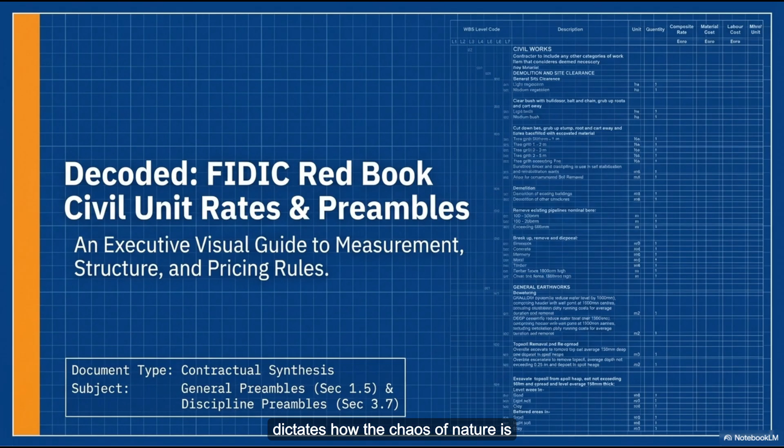Just a few. Yes. You have to define legally and financially the exact cost of every single grain of sand, every hour of labor, every potential physical risk. So when you see the unit rates priced out in euros in this document, it acts as a universal financial translator. It dictates how the chaos of nature is transformed into human order.

Yeah, perfectly put. And, well, before you can build that order, you have to dismantle whatever was there first. It's the ultimate blank slate. The demolition phase. Right, WBS category 600. And rather than just rolling in a bulldozer and pushing some dirt around, the schedule shows this hyper-granular approach to neutralizing the existing environment. Like, it starts with site clearance, and it prices trees not just by the fact that they are trees, but by their exact physical dimensions.

Yeah, the schedule breaks down the labor required in these precise increments. So it lists a baseline rate for removing a tree with a girth of 500 millimeters up to 1 meter. Okay. Then it scales up like 1 to 2 meters, moving incrementally all the way to a specific line item for a tree girth exceeding 5 meters.

Exceeding 5 meters. I mean, imagine standing in front of a tree that massive and knowing there is a predetermined euro value attached to the physical labor of cutting it down, grubbing up the stump, pulling out the massive root system. Wait, hauling it all away. Right, carting it away and backfilling the hole so the ground is perfectly flat again. It feels like a surgeon meticulously prepping an operating table. You're clearing the ecosystem so the real work can begin.

And that surgical prep also involves managing invisible forces before you ever even dig a foundation. Like what? Well, WBS 601 covers general earthworks, and it has these incredibly detailed pricing models for dewatering systems. Because if you are digging in an area with a high water table, the earth is essentially a giant sponge. Oh, right. You have to squeeze the water out and hold it back, or your trench just turns into a lake. So what does that actually look like on the ground? Like, how do you price holding back groundwater?

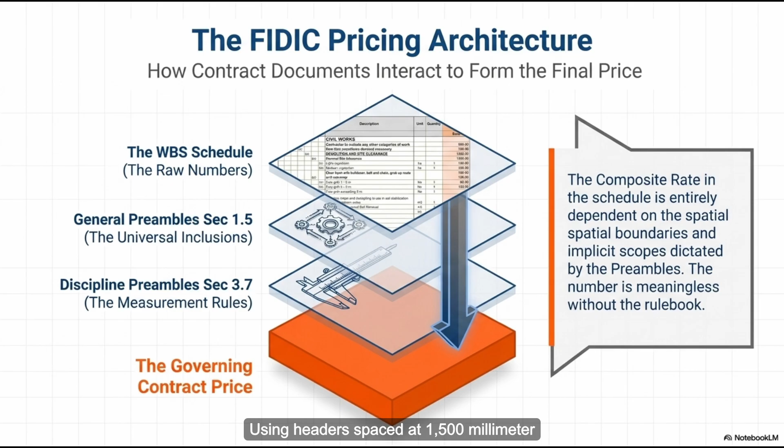It depends entirely on the depth and the physics of the water pressure. The document prices a shallow dewatering system, which reduces the water level by 1,000 millimeters using headers spaced at 1,500 millimeter centers. Okay, so that's for shallow water. Right. But if you need to reduce the water by more than 1,000 millimeters, it requires a deep system. So the well points are placed much tighter together, like at 1,000 millimeter centers, with significantly more pumping power.

Wow. You are literally paying for the mechanical force required to hold back the ocean or the local aquifer, just so your operating table stays bone dry. And once it's dry, you have to actually dig.

And this is where I need to push back a little bit on the sheer number of line items, because the document gets almost obsessive here. It really does. When it comes to excavating rock, they break the depths down layer by layer. There's a unit rate for digging rock at a maximum depth not exceeding 0.25 meters, then 0.25 to 0.5 meters. Half a meter to 1 meter? Yes. It marches down incrementally all the way to rock requiring blasting at depths exceeding 15 meters.

So my question is, why not just charge a flat rate for digging rock? I mean, rock is rock, isn't it? If I'm paying a contractor per cubic meter, why does the depth dictate dozens of different price tiers? What's fascinating here is that in the world of mega construction, risk is money. Okay. The deeper you go, the more the fundamental physics of the job change entirely.

Like digging rock at a quarter of a meter below the surface, you can use standard heavy machinery, like an excavator with a breaker attached. Well, you can just smash it. Exactly. It's predictable. You can see what you are doing. But once you go past 5 meters, 10 meters, and especially exceeding 15 meters underground, the geology becomes incredibly unpredictable. Because the pressure changes? Or is it that the density of the Earth shifts?

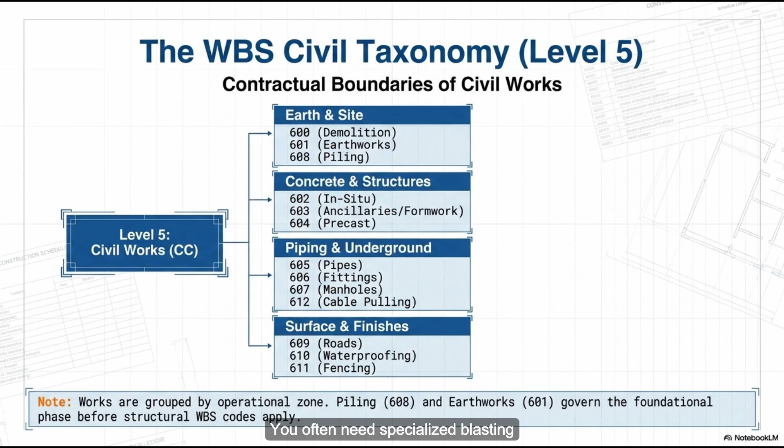Which means explosives. Explosives experts, safety perimeters, vibration monitoring for nearby structures. The schedule forces the contractor to account for that escalating unknown risk up front. By forcing the pricing into these micro increments, the contract acknowledges that removing a cubic meter of rock at the surface is fundamentally a different physical and financial undertaking than blowing up a cubic meter of rock 15 meters underground in the dark. That makes a ton of sense. You are pricing the uncertainty of the Earth itself.

Exactly. So the ground is cleared, the water is held back, and this massive, heavily calculated hole has been blasted out of the rock. Now, the physics problem flips. Just to build it back up. Right, you have to fill that void with something stronger than the Earth you just removed. Which brings us to WBS 602 and 603, the foundation. Mm-hmm. And the concrete specifications are really something. Concrete is never just concrete.

Yeah, those are synthetic, plastic-like fibers. You mix them directly into the wet concrete before it's even poured. Wait, how does that actually work? Does it replace the steel? In many applications, yeah. Instead of laying down a heavy, cumbersome grid of steel wire mesh, you mix millions of these tiny fibers into the cement truck. That's crazy.

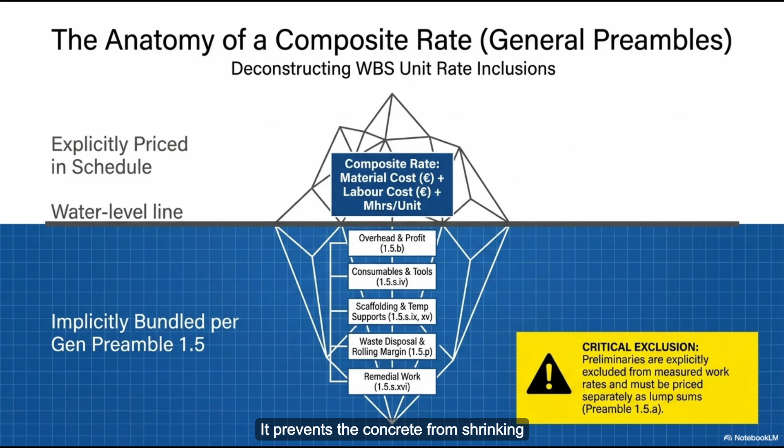When the concrete cures and hardens, those fibers act like a microscopic three-dimensional web holding the concrete together from the inside out. It prevents the concrete from shrinking and cracking as it dries, and crucially, it requires 0 labor hours to assemble compared to cutting and tying steel mesh. That is wild. And it gets even more advanced. My absolute favorite line item in the concrete section is the carbon fiber reinforced polymer strengthening strip, the Sika CarboDur. Oh yeah, that's high-end structural engineering.

The document specifically prices out applying these 1.2 millimeter and 1.4 millimeter thick carbon fiber strips bonded directly to the surface of the concrete with epoxy resin. To use an analogy, building with standard steel rebar is like putting bones inside the concrete to give it structure. But bonding these carbon fiber strips to the outside is like putting the concrete in an ultra-tight, unbreakable exoskeleton.

Yeah. It distributes the load and the weight entirely differently, giving it incredible strength without adding mass, like upgrading from a heavy iron broadsword to a high-tech scalpel. And that completely alters the economic nature of the build, because those carbon fiber strips cost significantly more in raw materials.

They are priced per meter in the schedule, but they require completely different labor and equipment compared to hauling and hoisting tons of solid steel. So it's a trade-off. Exactly. You trade material costs for speed and structural efficiency.

And the schedule goes just as deep on the temporary structures used to pour that concrete. The molds, essentially. The wooden or metal framing you pour the wet concrete into so it holds its shape while it dries. Yeah, and the schedule meticulously separates this formwork by the desired finish and the physical plane. You have separate unit rates for a rough finish versus a fair finish. Yeah. And then it breaks those down further by horizontal planes, sloping planes, vertical planes, and battered planes.

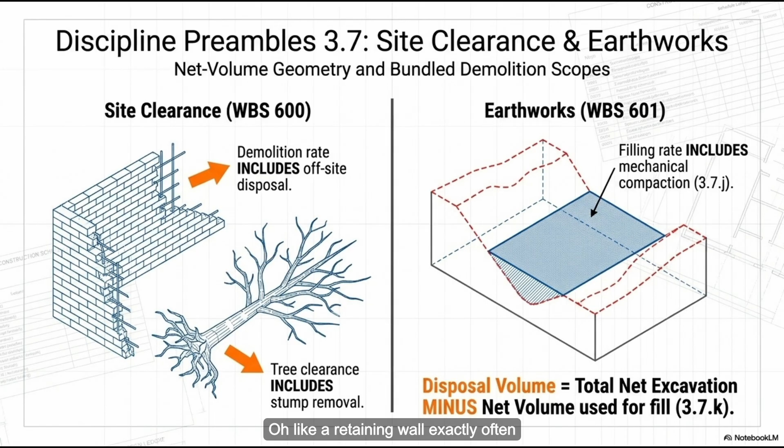So I have to ask, what exactly is a battered plane in this context? Because it sounds like concrete that's been in a fight. It does, right? Yeah. But no, a battered plane is a wall with a receding slope, meaning it leans backward as it goes up. Oh, like a retaining wall. Exactly. Often used to hold back earth.

So if you are pouring a battered wall and you require a fair finish, meaning a perfectly smooth, architecturally pleasing surface with no visible seams or imperfections, the mathematical precision required is exponentially higher than pouring a rough horizontal slab that will just be buried underground anyway. Because the mold has to be absolutely flawless. Flawless, and constructed from higher grade materials like specially coated plywood or steel panels that won't leave a wood grain imprint. The joints have to be sealed perfectly so no wet cement bleeds out and creates a ridge.

The labor time to assemble that flawless mold, the chemical release agents used so the mold doesn't stick, the care taken during the actual pouring, all of that is dictated by the phrase fair finish. So every time I walk through an underground parking garage or a modern building lobby and I see a perfectly smooth, sloping concrete pillar, I should be thinking about the fair finish, battered plane line item. You really should. That smooth texture isn't just an aesthetic quirk, it's a specific labor cost and material upgrade that someone calculated down to the euro. Every single aesthetic and structural choice is quantified.

Okay, so we have our high-tech, fiber-reinforced concrete foundation poured into mathematically perfect molds. But a mega project isn't just a solid block of stone. It needs systems to run through it, to supply it with water and power. Infrastructure. Right. And it needs to be anchored deep into the bedrock so it doesn't tip over. This brings us to WBS 605 and 606, the hidden underground world of pipes and piles, what I like to think of as the invisible nervous system of the project.

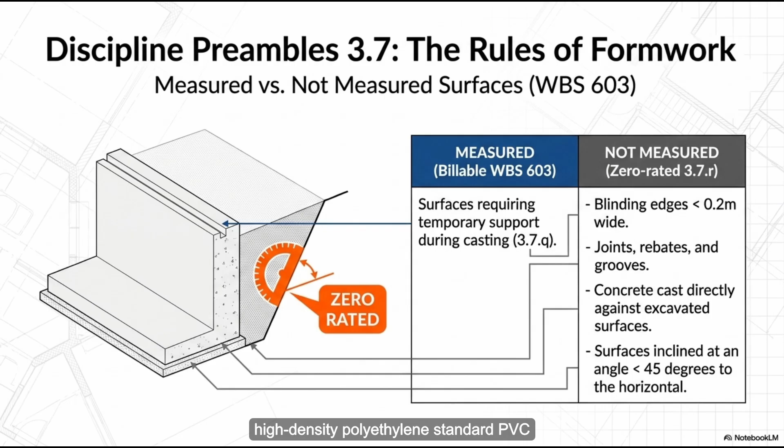Yeah, looking at the pipework specifications, it is a masterclass in how materials science dictates project planning. The array of materials is dizzying. The document lists GRE, which is glass reinforced epoxy, HDPE, meaning high density polyethylene, standard PVC, and galvanized carbon steel. And just like the rock excavation we talked about earlier, the trenching required to lay these pipes is highly specific. It starts with trenches not exceeding 1.5 meters deep. Then 1.5 to 2 meters, 2 to 2.5 meters, and 2.5 to 3 meters deep.

And here I go again, but I really have to challenge the logic of this spreadsheet. Why are there entirely separate line items and dramatically different price points for laying a 200 millimeter HDPE pipe in a trench at 1.5 meters versus laying that exact same piece of plastic pipe into a trench at 2.5 meters? It seems like it should be the same, right? Yeah, the pipe doesn't change. Isn't it just the same material sitting at the bottom of a slightly deeper hole?

If we connect this to the bigger picture, it is never just a slightly deeper hole. When you dig a trench for a pipe, especially as you approach that 3-meter mark, you are fighting a massive war against gravity and earth mechanics. Okay, how so? Well, a 1.5-meter trench might be relatively stable on its own, depending on how cohesive the soil is. But a 3-meter trench, which is nearly 10 feet deep, is a potential death trap. Because the walls want to cave in on whatever's at the bottom.

And gravity is unforgiving. A single cubic meter of soil can weigh as much as a standard car. So if a 3-meter trench collapses on a worker who is down there laying that pipe, it is instantly catastrophic. Oh my God. Yeah, so as that trench gets deeper, you aren't just paying for an excavator to scoop out more dirt. You're paying for exponentially more complex shoring systems.

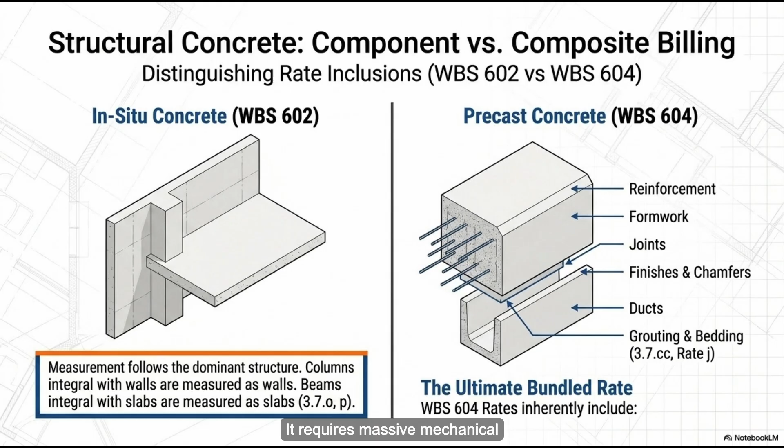Right. The piece of HDPE pipe is identical, yes. But the environment you are forcing human beings to work in to install that pipe becomes vastly more dangerous. It requires massive mechanical intervention just to keep it safe. Wow. So the price increase isn't about the pipe at all. It's the cost of keeping millions of pounds of earth at bay while the pipe goes in.

Exactly. That perfectly transitions into the other half of this invisible nervous system, the piling. Because if you think holding back a trench wall is fighting gravity, piling is where we see the true scale of the forces at work in modern construction. WBS 608. Yeah, the piling specifications reveal the immense hidden anchors that keep our world upright. The document lists isolated steel piles, and it prices both the pre-boring and the piles themselves by their mass.

And the mass is staggering. They start with light piles under 15 kilograms per meter, but the scale goes all the way up to massive steel piles that weigh between 500 kilograms and 1 metric ton per meter. Just massive amounts of steel. Just 1 meter of this steel pillar weighs as much as a small car, and they are driving dozens of meters of this into the earth.

But the part that really caught my eye was the testing. They don't just hammer these massive steel columns into the ground and hope they hold the building up. The liability of hoping for the best is a risk no one can afford. The schedule mandates and prices out rigorous pile tests with maintained loading for various reactions. And again, the scale is wild.

The tests start at a required load not exceeding 100 tons, which is heavy. Very heavy. But it scales up: 200 tons, 400 tons, 800 tons, all the way to a line item for a test load between 800 and 1,000 metric tons. To give you, the listener, an idea of what that means, 1,000 metric tons is roughly the equivalent of stacking two fully loaded 747 jumbo jets on top of a single steel pillar no wider than a manhole cover.

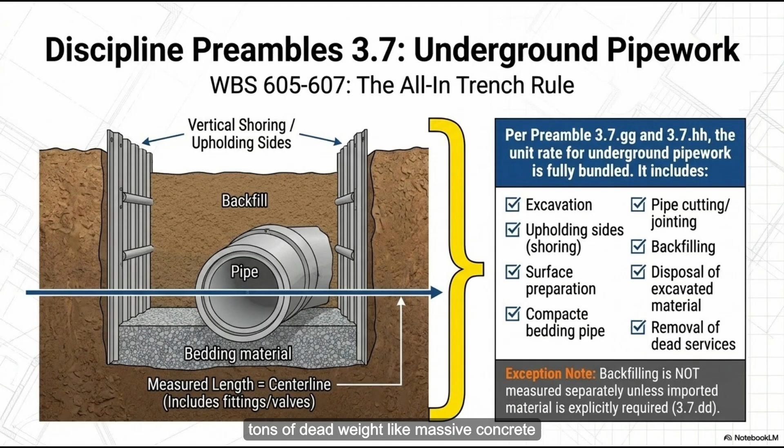How in the world do they even test that on a construction site? It requires an incredible mechanical setup. To simulate the weight of the future building, they usually build a massive steel reaction frame over the pile. Okay. Then they either pile hundreds of tons of dead weight, like massive concrete blocks, on top of the frame, or they anchor the frame into adjacent piles. So it can't move. Right.

Finally, they place enormous hydraulic jacks between the frame and the test pile. The jacks push down on the pile with 1,000 tons of force, while highly sensitive gauges measure if the pile sinks into the earth by even a millimeter. That is just brilliant. It's vital context for how we experience the built environment. Like when we stand on the top floor of a skyscraper, we feel weightless. The building feels completely static. We don't feel the structure straining against the earth. Right, you just feel like you're in a room.

But those 1,000-ton pile tests represent the immense invisible forces constantly required to keep a modern structure upright against wind shear, gravity, and potential seismic activity. The contractor has to physically prove, through the sheer force of hydraulic jacks, that the earth and the steel can handle the load. And this document dictates exactly how much they get paid to engineer that proof. It's incredible to think about the sheer physics of it all happening right beneath our feet.

But eventually, all this deep infrastructure, the earthworks, the deep trenches, the massive steel piles, has to emerge above ground. It does. It has to become a surface that human beings actually walk on, drive on, and interact with. And that's where the schedule shifts in a really fascinating way, moving from the invisible to the visible, Category 609.

Yeah, the document transitions into roads and pavings, moving us from the realm of pure geological physics into the realm of human behavior. The schedule details the road subbases, the granular material, the asphalt concrete wearing courses, again, all measured perfectly by thickness, from 30 millimeters up to 300 millimeters. But the part that really stopped me in my tracks was the signage and ancillary section.

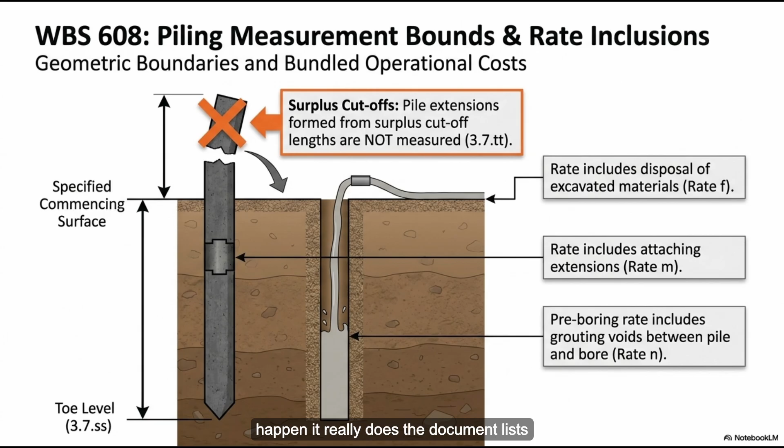The signage requirements paint a very distinct, almost alarming picture of the environment these mega projects create. It reads less like a construction schedule and more like a script for a disaster movie waiting to happen. It really does. The document lists exact, highly specific warning signs that the contractor must supply, install, and price out. Things like danger flammable liquid, danger confined space, hearing protection must be worn. Standard stuff, but a lot of it.

Yeah, but then there's a line item that is incredibly specific. It says, danger, no naked flames, no smoking, no matches, no mobile phones, no cameras. It highlights a highly restrictive, highly volatile environment. So what does this all mean?

To me, it shows that you can calculate the exact compressive strength of Class 60 concrete. You can perfectly measure a 1,000-ton hydraulic load on a steel pile. But the moment you introduce actual human beings to the site, human error becomes the ultimate variable. Absolutely. The construction site is this living, breathing ecosystem where a single dropped match or a distracted worker looking at a mobile phone next to a fuel line can undo millions of euros of perfectly calculated engineering in an instant.

This raises an important question. How do you calculate the cost of safety? Right. How do you even put a price on that? Well, while the earthworks and the concrete pouring deal with the rigid laws of physics, the signage deals with the laws of liability and psychology. Every single sign on that list represents a specific, documented hazard that the contractor must legally and financially mitigate.

Oh, I see. If they fail to post the danger confined space sign near one of those 3-meter deep trenches we talked about, and a worker enters without proper ventilation and gets hurt, the legal ramifications dwarf the cost of the entire trenching operation. So the euro rate attached to that sign isn't just for a piece of metal and some reflective paint. No, not at all. It is the price of a legal shield.

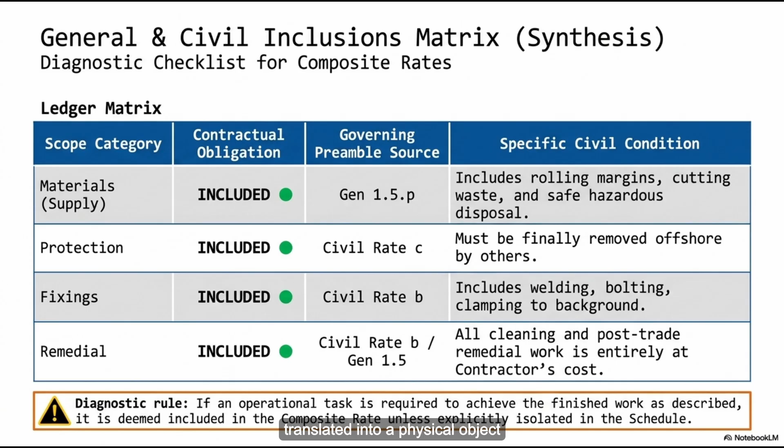It's the cost of behavioral engineering. You are paying a specific unit rate to modify human behavior, trying to protect both the physical asset you are building and the fragile human lives building it. It is risk management translated into a physical object. That is a profound way to look at a spreadsheet. We've gone on quite a journey today through this single document.

I mean, we started by calculating the exact physical cost of clearing a 5-meter wide tree stump from the earth. We did. We've mixed microscopic plastic webs into our concrete and strapped carbon fiber exoskeletons to the foundation. We've buried high-density polyethylene pipes 10 feet underground, fighting the crushing weight of gravity with hydraulic shoring. We've simulated the weight of 2 jumbo jets on a single steel pile. And finally, we've hung a no mobile phone sign to try and engineer human behavior so the whole thing doesn't go up in flames.

It is the complete life cycle of a project, reduced to its core economic, physical, and psychological components. And knowing all of this completely changes how you see the world. The next time you, our listener, are walking through a modern city or driving across a paved road, I want you to remember that you aren't just walking on asphalt and concrete. You are moving through a living, breathing spreadsheet.

Every curb, every pipe hidden beneath the sewer grate, every warning sign on a fence has a hidden tag on it. It all has an exact work breakdown structure code and a highly specific labor and material cost attached to it. Nothing in the built environment is accidental. Everything has been accounted for, negotiated, and priced out to the millimeter. Everything. Which leaves me with a final thought for you to mull over.

If every single physical object in our built environment has a specific cost, a hidden tag, and a calculated risk attached to it, what would it look like if we applied this unit rate logic to our own lives? Right. How much labor and material goes into building our own daily routines, our habits, our personal foundations? Are we pouring our energy into the equivalent of rough formwork? Or are we taking the time to build a fair finish?